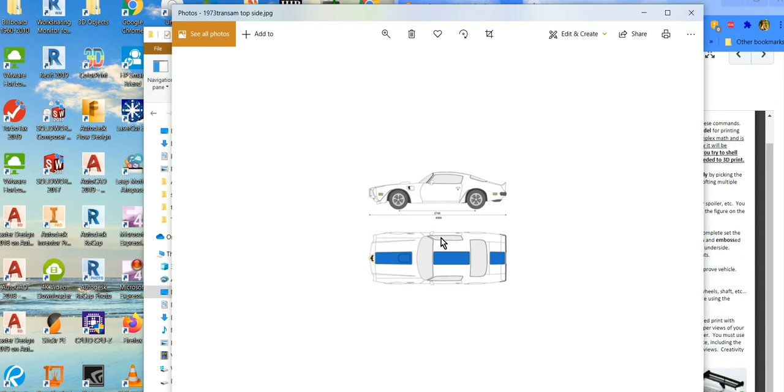So for fillet, you need to figure out where there's a curve on your vehicle. Probably the front view will show you that more than anything. So if I got my front view here, yeah, it looks like there's not a lot of curves in this thing. There's some at the top, maybe right here, and some at the bottom, and maybe on the fenders a little bit. So I'm just going to guesstimate on that a little bit. This isn't meant to be crazy accurate anyway.

So this thing is only 10 inches long, so probably an eighth of an inch or a quarter inch fillet would work out the best. So I'm going to pick fillet here, and they're not all going to work.

Okay, so you can pick your lines here and try to blend them. If they show up like that, as an example, and you get a good preview, that means they're probably going to work. If you get a bad preview, they're probably not going to work.

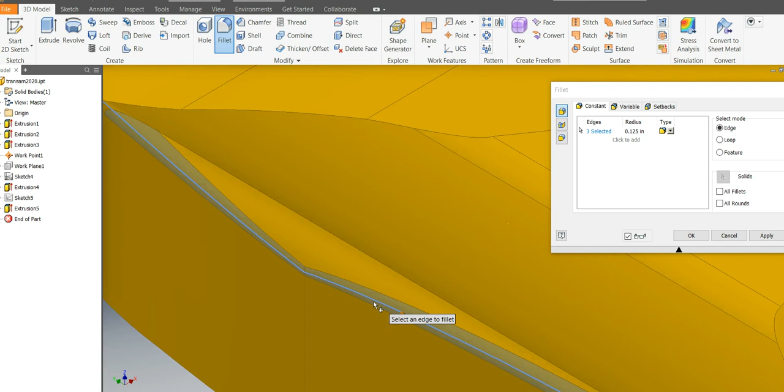You can try to keep going around the curve like that. If you have good luck, they'll go all the way like mine did there, and it's going to make it nice. I would probably try to increase that until it blows up. So maybe 0.25. And it actually went at 0.25, which really surprised me.

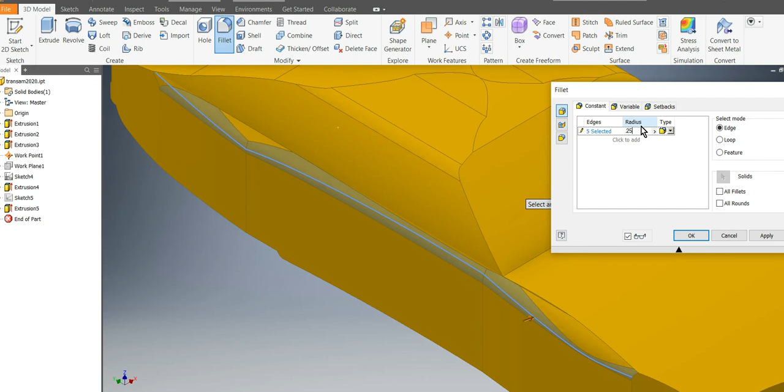Now, if I go much more than that, I can see it's running into the sidewalls here. It probably is going to fail. For instance, 0.375. And it failed. Okay, so once it fails, you just keep going back down. 0.25 is big enough, so that'll be a nice fillet on there.

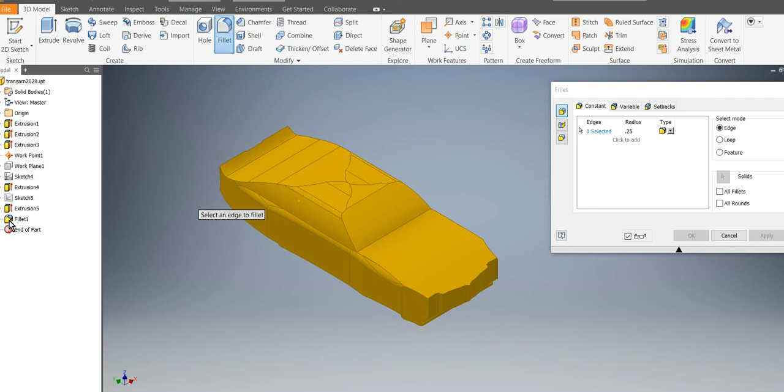So I'm going to hit OK, apply. Now the thing is, you want to do it on both sides, and if it fails on the other side, which it will sometimes, then just go back to the fillet over here and shrink it in your browser. Okay, so it's stuck at quarter now.

You're trying to remember exactly which ones I did, right? Otherwise it won't look normal. Okay, and you could theoretically mirror that, but it usually doesn't work. Okay, so that's an example of a fillet, all right?

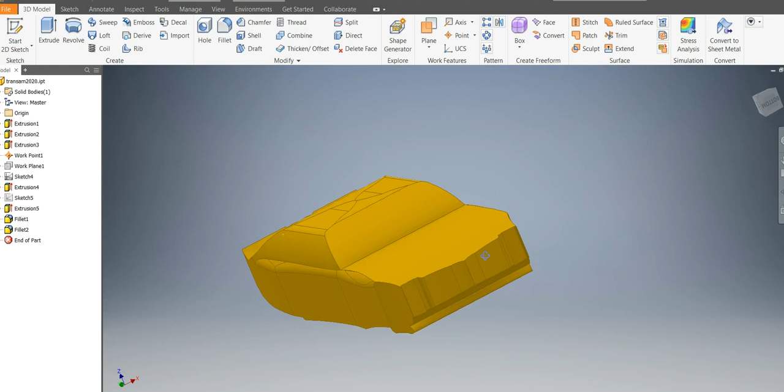And you probably should maybe do the roof. It kind of blends out the lines a little bit. Probably do the roof, probably do around the window here. That would look a lot more normal if there's a fillet around that. Same thing with the back window there. It's pretty squared off. Maybe some of these lines in the front, fillet them. Just make it match your car so it's going to look like your car.

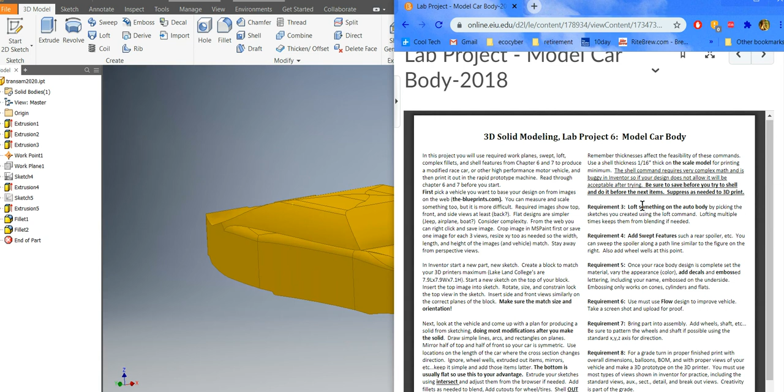The next thing on the list was shelling, because I tell you to shell before you loft and sweep, since usually these are small, skinny items, and shelling them out doesn't really work very good. Usually, when you shell something to a point, a lot of times it'll break. Okay, and it's after the fillet.

You have to do all your fillets before you shell too, because of course this corner is gone now. So if I try to shell something and then fillet it, it will not work. You won't be able to fillet it because it'll make it too empty. So you got to fillet first before you shell.

Make sure you save before you shell. Okay, you can always turn the shell off if you're not happy with it. And later on you can cut windows in it. You could add fins to the back if, like, you had an old Mustang that has those louvers on the back.

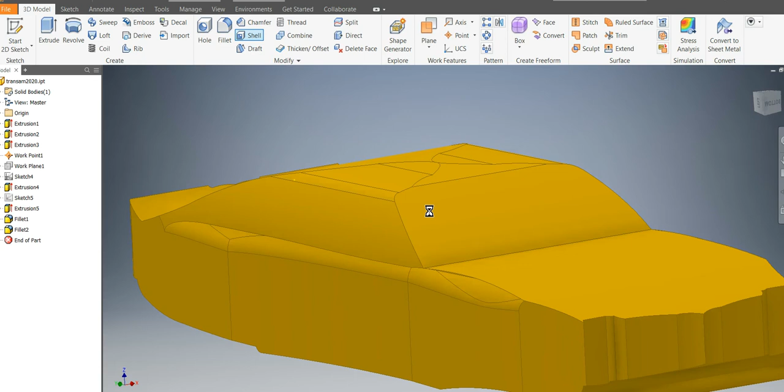Okay, so for shell, you basically pick shell, and remember this is a pretty thin vehicle, not very big. It's 10 inches by 10 inches, so an eighth of an inch would be God's plenty. I think most 3D printers will print down about 20 thousandths of an inch thick, so you can go a lot thinner than this even.

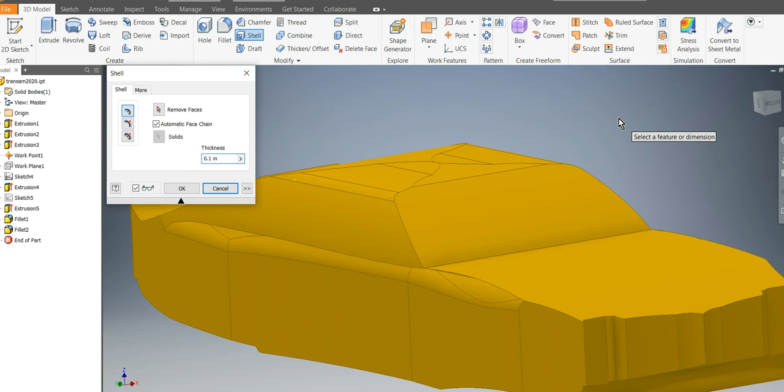I'm going to pick, it's looking for a face right here at the very bottom. You can't see it. It says select surfaces to remove. I could at this point pick like the front windshield and stuff, but it's kind of dangerous to do that. I think you're safer just shelling it out and then cutting out what you want. So I'm not going to pick any faces.

All right, I'm just going to pick OK, and it'll probably error out. Some of these points, like right there, that real sharp point, will probably make it fail. And see, this is what it does. It might come out of this, it might not. I'm going to pause the video and see if it comes out of it.

Okay, it came out of it, but it's got an error. You can expand these and see what the error actually is. Okay, it says the attempted shell operation requires large topology change. Try with a smaller thickness.

So it's like locked up. There, let me go with it. Okay, so 0.001 — so I can't 3D print it. Start out small and see what happens, see if it comes out of it. So I'm gonna hit OK there.

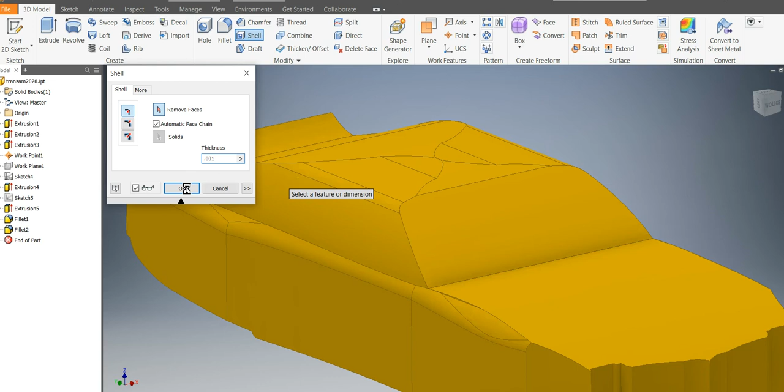And it made it at that. Okay, so later I would go in here and try to make it thicker. So it did survive at 1/1000th of an inch thick. Now that is very, very skinny, so you can't even see it unless you really look at it close.

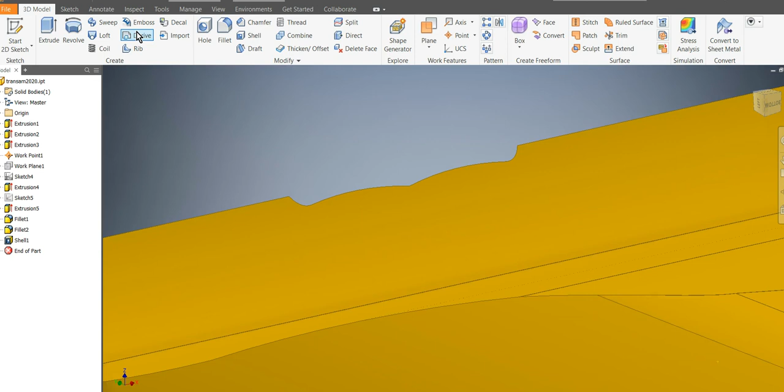So if I go this shell, one way to see it is you'd go into View, Visual Style, and Wireframe, or Wireframe with hidden edges. I think that'd probably be the best. There's a couple of them in here that actually show up pretty nice. Shaded with hidden edges might be nicer. You can't see much of that though.

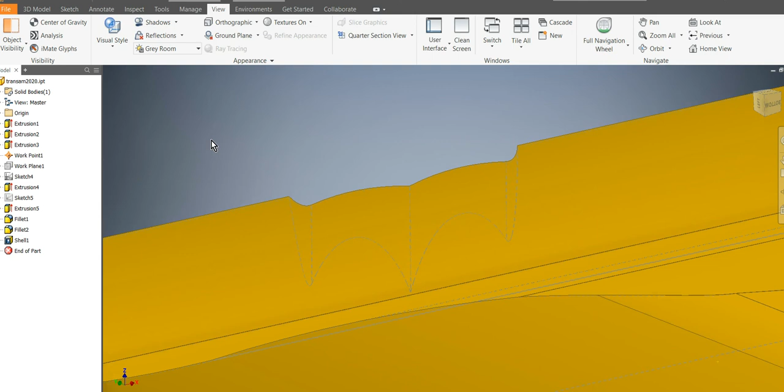Now, it's probably not even going to show up unless I really zoom in. There, you can see it. So see, there's a thousandth of an inch thick wall in this. Okay, so it did shell out correctly. So I would double click on this and go up to like 10 thousandths, or 5 thousandths, and maybe 20 thousandths until I get it to fail. But I'm not going to do that right now.

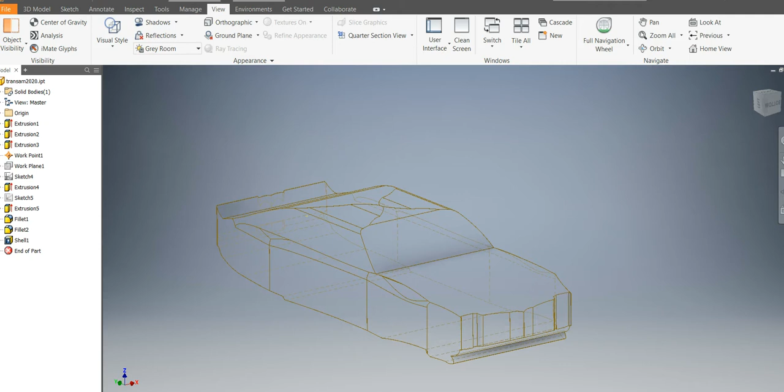So save. Okay, the next one I think was on the list was Loft. Yeah, number 3 is Loft. Loft makes one object into another object, so that's pretty tough. So I definitely wanted to do a video on that one.

So let's go back to a regular — I usually go shaded with edges as the default. And while I was in that, you can kind of do some pretty crazy stuff here. So you can go to, if you got a fast enough computer, you can go to realistic. Okay, and that gets rid of those edges.

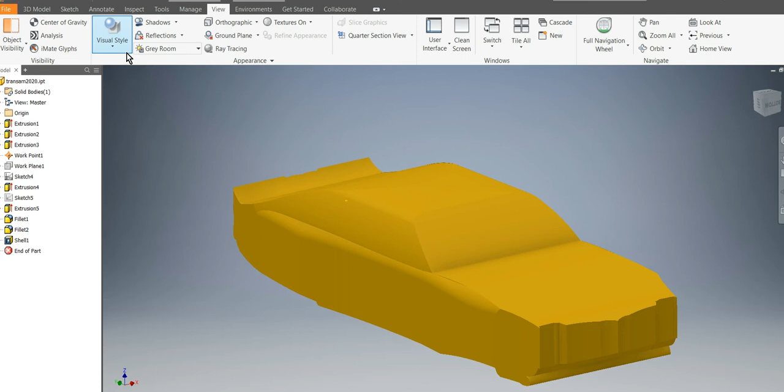And then while you're in realistic, you can do ray tracing, and that'll slow it down, but it'll basically make it look cool eventually. And once you get the decals and everything on it, it really looks realistic. So let's take that back off. But that's a nice way to kind of see what you got going on there — shaded with edges.

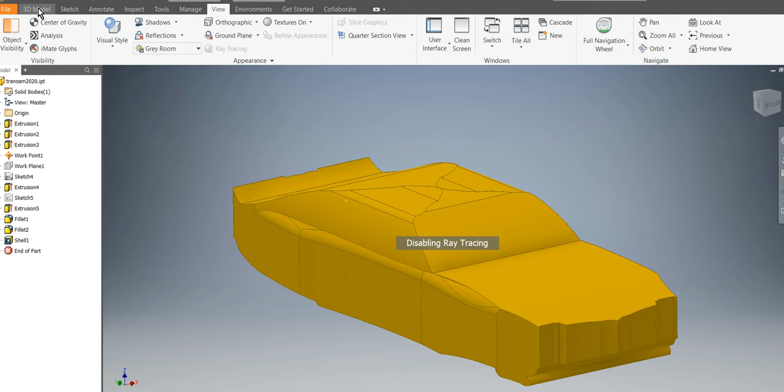Okay, go back to 3D model. So to make this a mirror, of course I'd go back and look at the front again. So it looks like my mirror is basically a skinny circle coming out of the sidewall, going to a kind of a rectangle with fillets on it. So that's what I'm going to try to do — make it kind of match that one.

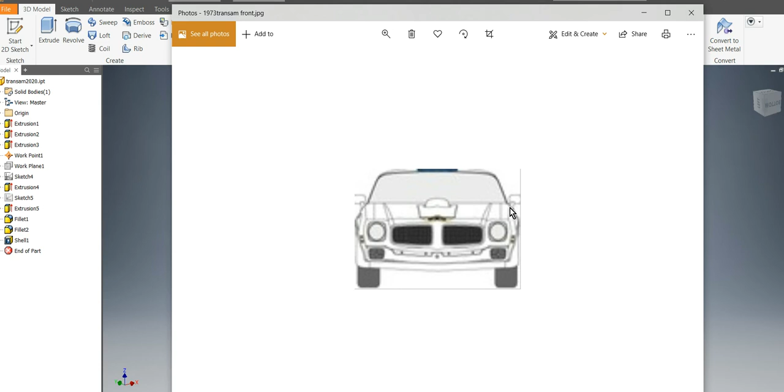It's a little tough, but you just kind of got to do a little bit of estimating. So maybe it's about 3/4 of an inch by 1/4 inch on there. You can always change the sizes. Just sometimes it's good to freehand it a little bit. So I would assume the mirror's coming out of a place about right there.

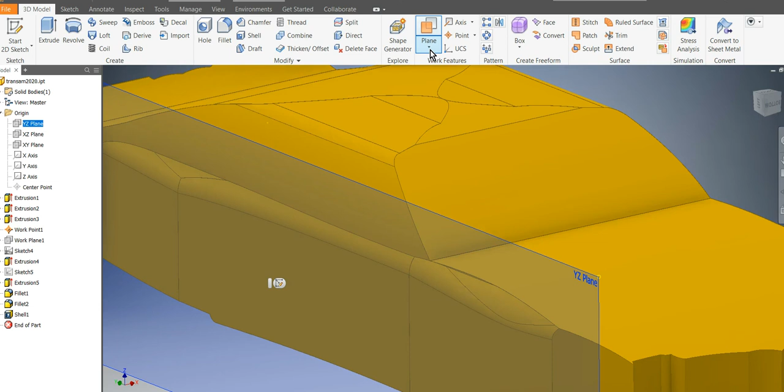So I'm going to need a plane at least inside this a little bit. All right, so I'm going to find a plane, and everybody's got to do this one — that's that face. That's the right face, but the wrong point. Okay, so I'm going to go over here, and that is the YZ plane.

Now I'm going to go to plane here, and I'm going to do parallel plane through a point. Okay, so I pick that, and I already got this plane selected. Now it's looking for a point to go through. So there's my point. Okay, so I've got a plane now right on that point, and it's probably not deep enough, so I can bring it in maybe another 1/8 of an inch.

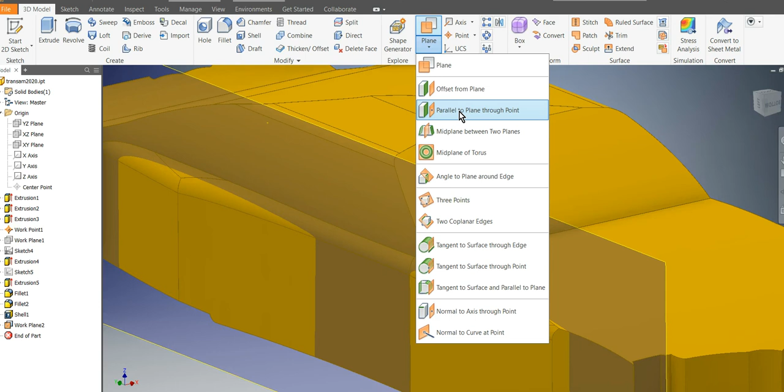So I'll do parallel to that plane, parallel plane, offset from plane. So I pick that one, and it's going in the correct direction, maybe 0.25. Okay, all right, so now I want to draw inside there. So on that plane, I'll probably hide this other one — I'll have to look at it. Turn visibility off. So I've got this plane that's bisecting my part pretty.

Did I do the right one? I turned the wrong one off. There we go, let's try this again. Visibility on. Visibility off. Why are they doing the wrong one?

All right, I think that one's deep into the car. That's what I want. You can mirror the mirror. So that's kind of, and even the wing.

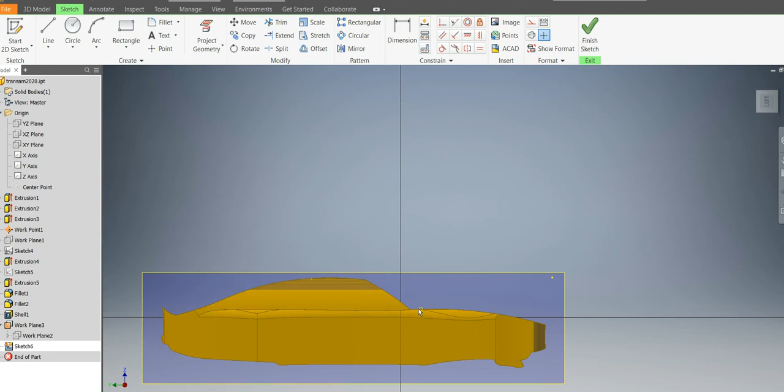So on that plane I'm going to draw my first sketch of my loft. This is a little tricky, but you want to think about where the mirror would be. It's probably going to be right about here. So I'm going to draw a circle on there. Well, I don't like circles, an ellipse, it'll look cooler. So right about on this point, somewhere in there, I'm going to draw it to be aerodynamic, coming out like that.

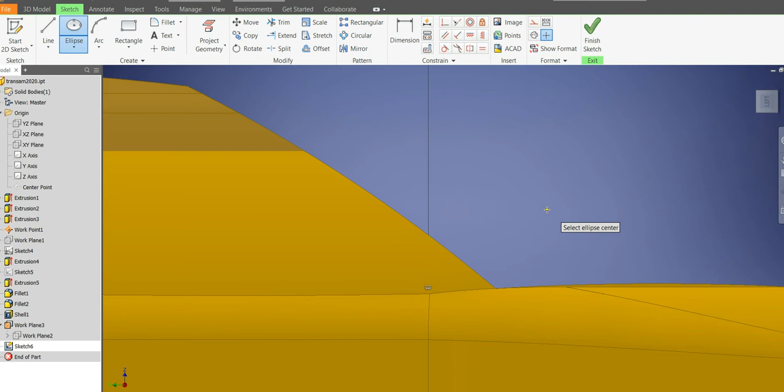Now you can't see it. If you hit function 7, I can see - it'll actually break away the stuff in front of it. Then you can see it. So that sketch is finished, close enough.

Might be a little bit too small, but oh well. Now I want to do one that's parallel to the front of the car, back at just past that point. So remember where you're at - I'm right here, so I need to go a little farther past that. I'm going to make a plane parallel to that one through a point, picking this same point as I had before.

Now I'll make another plane offset from that one and go that way, maybe 0.25. Let's see how much that is. Close, that might not be enough. Let's go 375 - you can always go change it later, you just double click on that plane to change it. Even after you made your design, you can change it by double clicking on that plane.

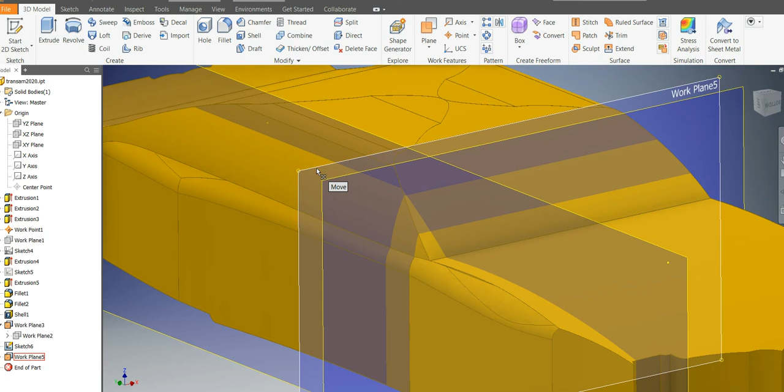All right, so I need to put the actual mirror face that you would see on that plane. So new sketch - I'll probably hide that plane again. Let's see if I can do it in less than 10 tries this time. So that's the one I want to keep, so this is the one I want gone, I think.

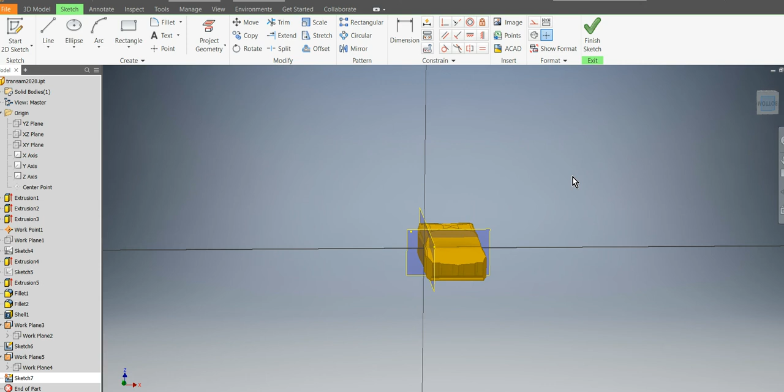So I'm going to hit F7 to see where my car is at again - function F7, can't see my keyboard. You can see it is hollow on the inside. That's kind of cool. So now I'm going to go make another ellipse.

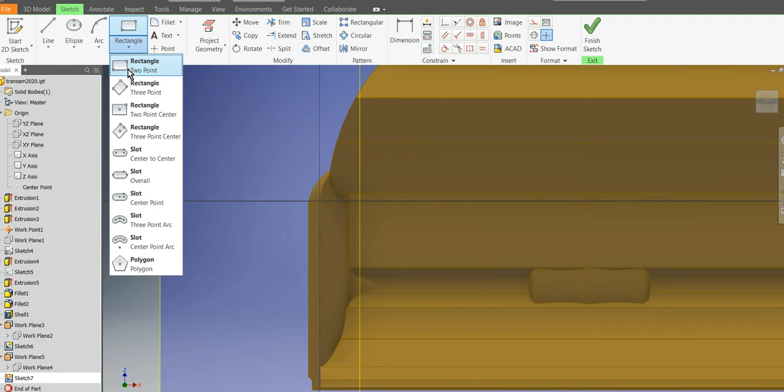I'm going to make a rectangle, right kind of rectangle. I don't know, there's none in here I like. So I'm going to make a 2-point rectangle, put some fillets on it, I guess. So right here's my origin, I think - where's my origin?

You've got to be - it's got to be on the outside of the car to see your mirror. So, 2-point rectangle. That's fine, I can always change the sketch later if I don't like it. I'll put some fillets on it. See how quarter's too big, so maybe 0.06.

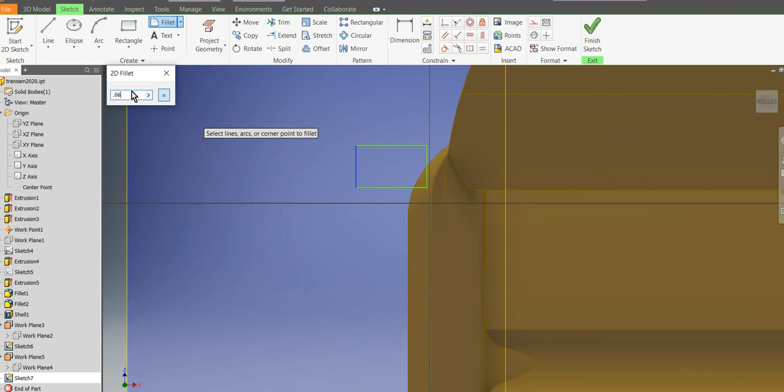That looks good. Just kind of round it out so it doesn't look so stupid, right? And then finish that, finish sketch.

Now you can try a loft from there to there. It's nice to have a guide path - a guide path has to go from this sketch to this sketch, and it makes it look more realistic instead of going just straight over there. So I'm going to do that. I'm not making you have a guide path because that's pretty hard, but it still does - if you want a cooler looking mirror, it does help you get a cooler looking mirror.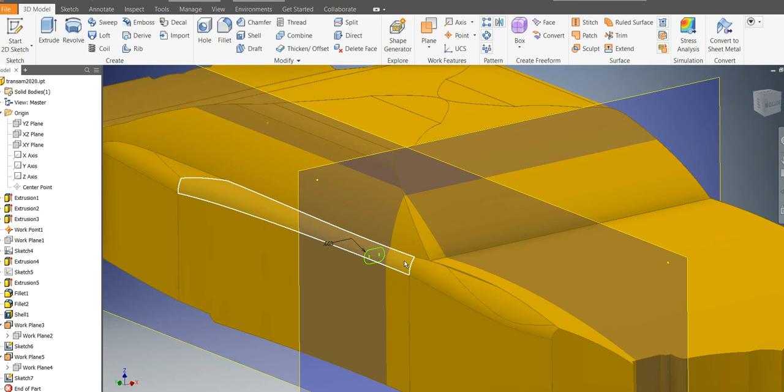So on the other plane, the only one we didn't use, I need to do the same thing again - offset through point, maybe right into there, so then I know it's crossing because it's got to be inside there. Okay, now I can draw right on that one. I don't need to make a whole nother one there. So new sketch on that plane.

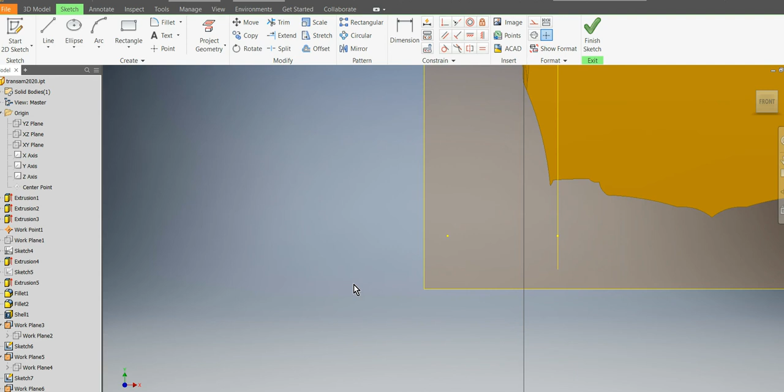Hit F7, and I probably won't be able to see my other sketch here. I can see it good. All right, so I need to draw something from here, that sketch to this sketch. I'm going to draw an arc, and hopefully that little circle will go into that big circle.

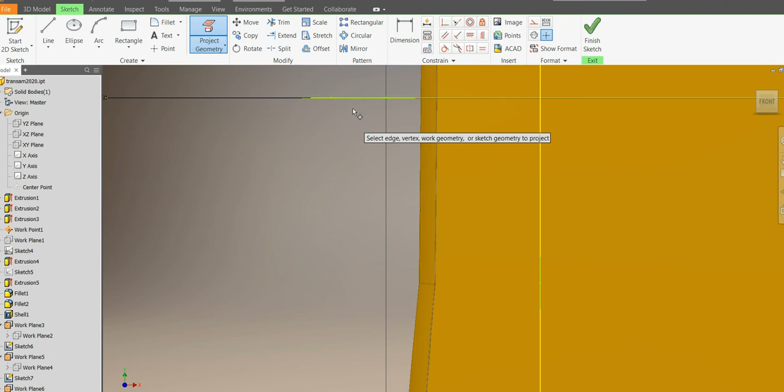I'm going to project geometry, project the center point. Try to - I think I got it. Arc. No, I didn't, gosh darn it. Try again, project geometry. So if I hover over this long enough, it ought to give me options. It did - so I hovered over that, and I got point, curve.

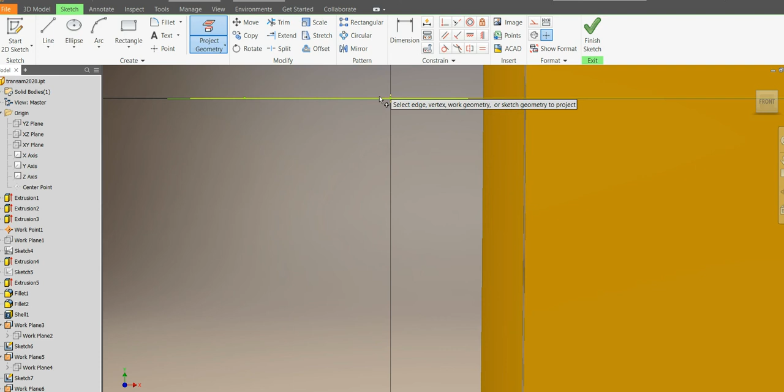Which one is it? There's a lot of options here. Try point, I got that one. Good. Alright, I'm going to do the same thing over here.

Project geometry, hover over this until I get what I want here. Okay, takes a while, drop it down. Face, work plane, I don't want any of those. Maybe I can put a point on that. Yeah, I was able to put a point on it.

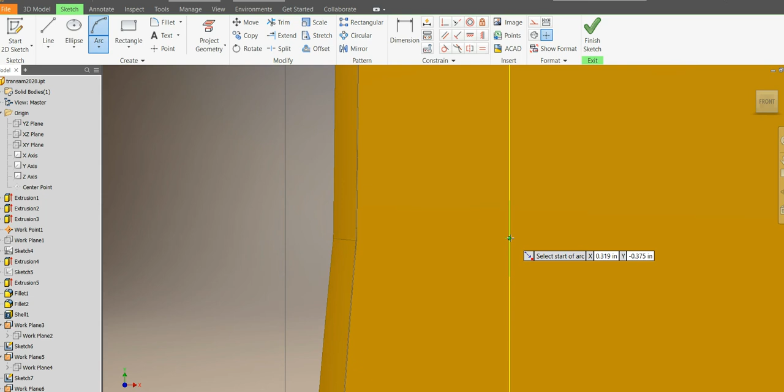Good, so now I'll draw an arc from that point to this point. Although Inventor's points are first, last, and then radius. So, yeah, looks pretty good. I don't know, finish sketch.

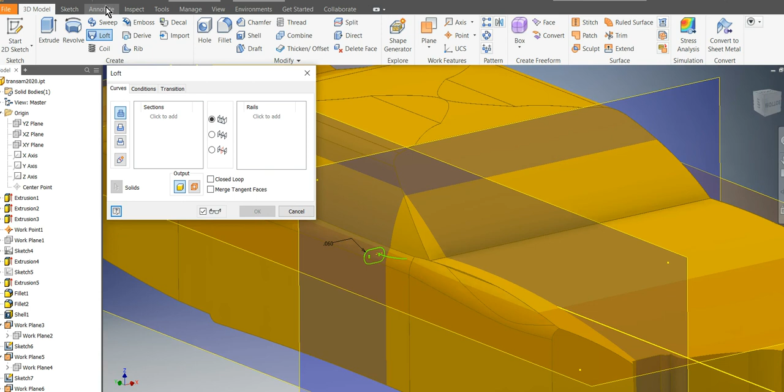Alright, so now we're going to do a loft. All that just to do a loft. Okay, so loft is there. So you pick your first sketch, and I'll probably have to go to View, Visual Style, Hidden again, Wireframe.

And I can see my sketch in there. So I pick it, second sketch, pick it. Okay, you can see what it does. It goes straight over there. It looks stupid. So then you pick guide rail, and I usually pick the middle one.

And then I select my guide rail. Okay, but now look at it. It's blended pretty nice. Now you can adjust that guide rail.

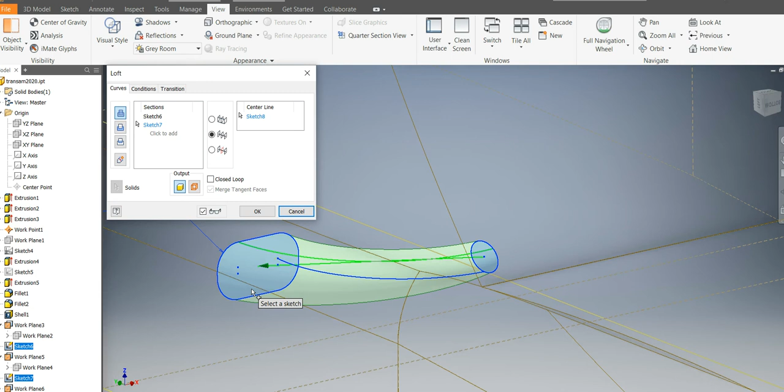Go back in that sketch and adjust that. Go back and sketch, adjust that. Go back and sketch, adjust this to make it look even better. Okay, but that's basically how you do it.

And then you can see, then you're looking. It's a pretty decent looking mirror, actually, not bad. And then you mirror that to the other side to get the other one. You mirror it across a mid-plane.

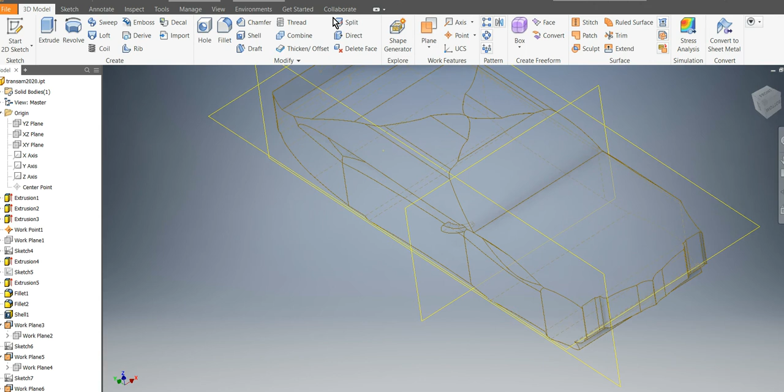So we made a mid-plane last class. If you don't have one, you just pick 3 points in the middle. So to go over that one more time real quick, I go to plane, 3 points, which is the most standard way to make a plane, 3 points, and pick 3 points that are in the middle.

There's one there, and I want a nice one. I'll pick one in the middle on the other side. There's one. So now I've got a nice mid-plane.

I can mirror that across real quick, easily. Just mirror, pick my feature, which is this thing, go to pick my plane, which is this thing, and hit OK. And sometimes it'll fail, but it didn't fail there. Now I got 2 mirrors, okay?

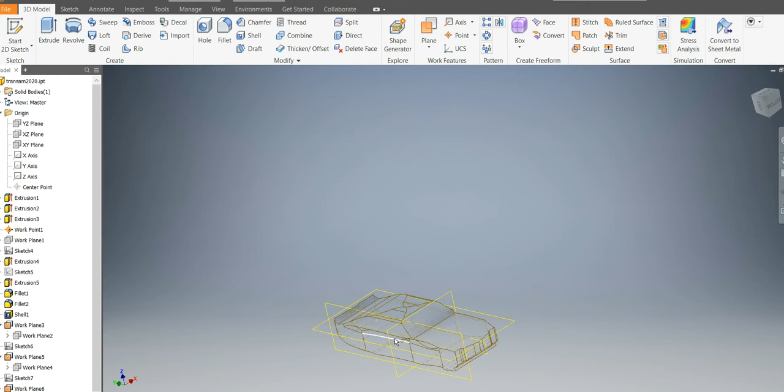Now I'd make that bigger. That looks too small, but anyway.

Okay, so the next one was a sweep. Sweep is the same thing. It's easier, actually. It's exactly the same thing, except it's a sketch following a guide path, or a profile following a guide path. So you only need one sketch.

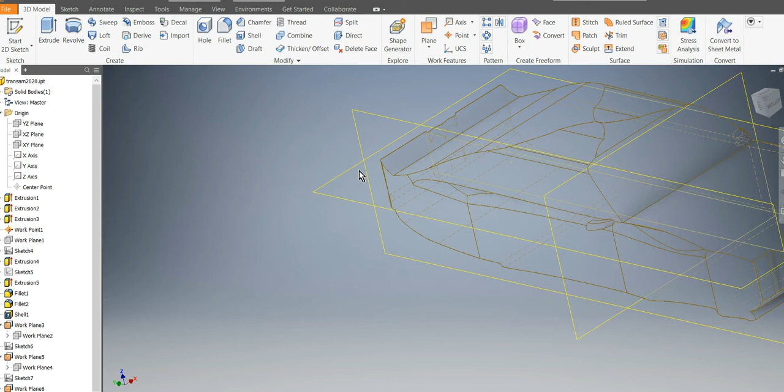So like a wing, for instance, I would do on the top of this plane here. I'm just going to do it real fast. I've got a back spoiler, so I don't know if I'd really want a wing on this or not, but just to show you how it works, I'd probably just do it all with arcs.

Maybe come to a good spot like, I don't know, something like that. Give it a little bend, not much. Do another one up here, and this one's going to be tight. This is about a half circle.

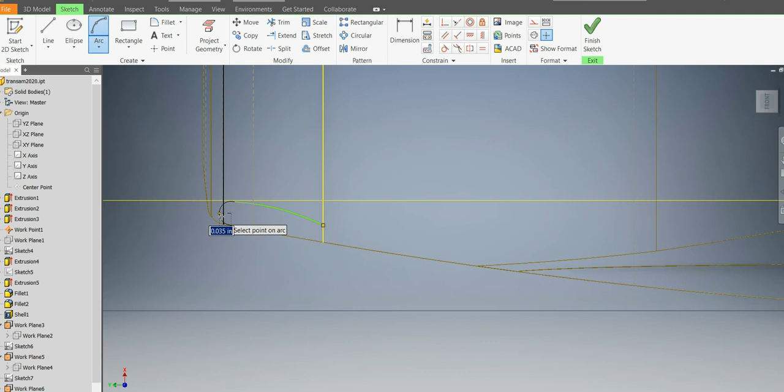Try to make them tangent so I don't get any lines there. I had it, there, I got a tangent there. And bring it to this one. See if I can get a tangent over there too.

It's not letting me, but I could probably force it. So if you want to get rid of it, there'll be a line here unless I force a tangent by picking that line and this line. And that did a tangent. So this should be a nice wing profile.

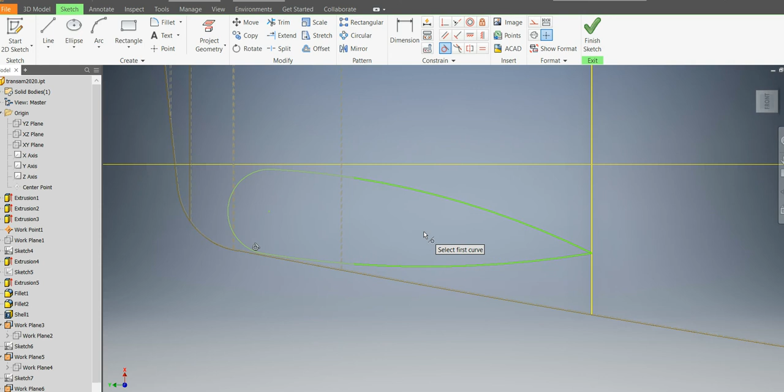And then you need to put a plane right here in the middle of this thing, okay, and draw what profile you want to take. So if I finish that sketch and put like this plane straight back there, so I go plane, offset plane through point, pick this plane here, put it through, I don't know, right about in the middle here.

I got to find something in the middle. I don't have a point there, so you got to create a point. Create a point in the same place as you create a plane. I'm gonna put one right in the middle of this thing if it lets me.

I'm still on something else. Point. I was hoping it'd let me put one in the middle of this, but it ain't.

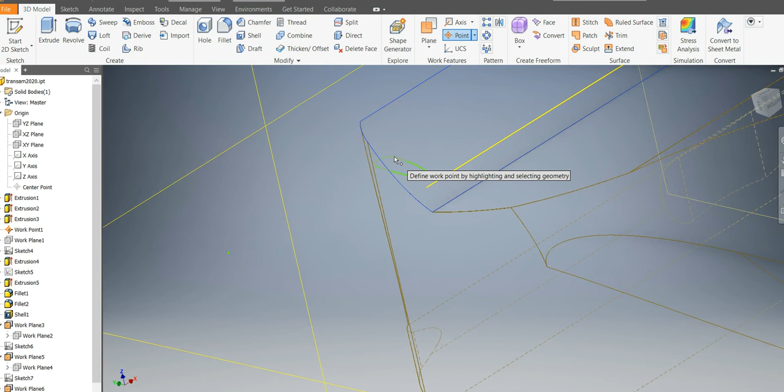That stinks. Do I get one? Well, usually it'll let you do that.

Let's try right at the beginning of this thing. It's letting me put one. Is that bisecting it? Barely. I should be able to offset to that and maybe go back another half inch or another eighth of an inch if I have to. So I'll plane through point.

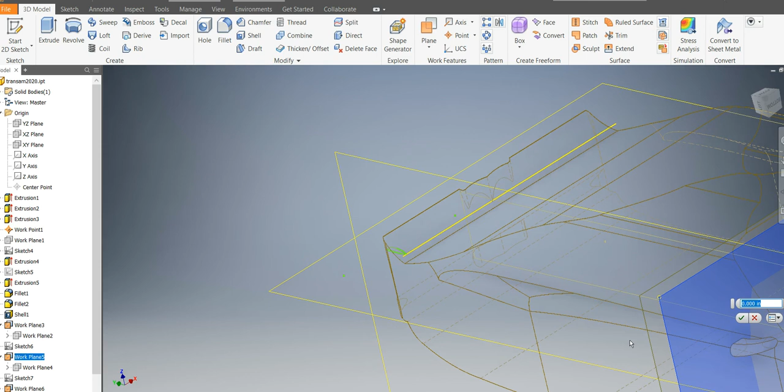Or you can just offset from and make sure it goes through the middle of that. Let's try that. I'll do that, going in the right direction, maybe 4 inches. Then go to the side view until you get it right through the middle of your item there.

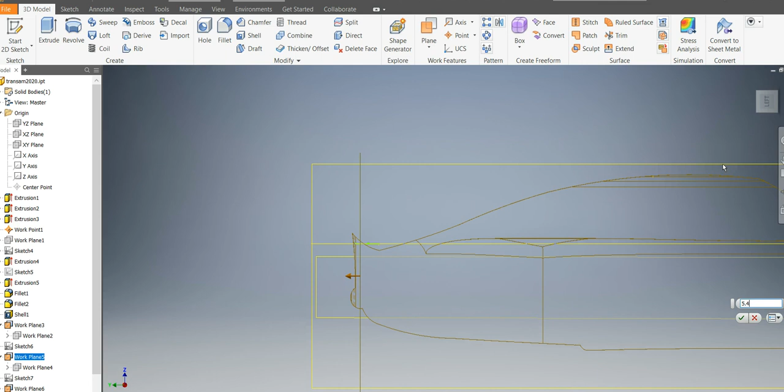There's my plane and there's my sketch, so it's not enough. I go sideways 5, 0.8, too far, 0.4. There, I've gotten inside of it a little bit. 0.3, looks like that's in the middle. You can go to a corner view like this and see it a little bit better. Make sure it's in there, yeah, so that's good.

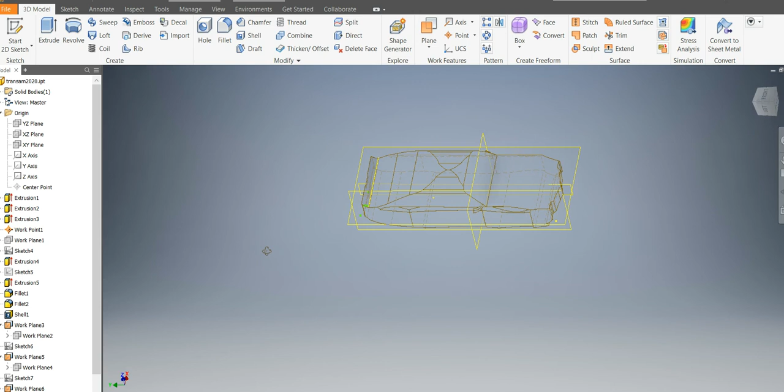So that's the plane where I want to draw my sketch on. Did I not do it? I think I just exited out. Okay, try again - plane, offset from plane. I think I did 5.3. Yep, got to finish it. Check mark. Okay, so I've got that plane.

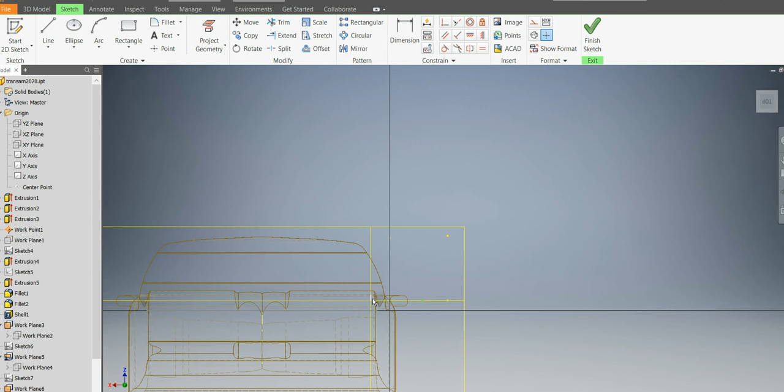Now I'll draw my path on that, so a new sketch on that. Remember, the path needs to go through your wing, which looks like it's right there. You can go to a corner view to see it better. So I'll probably start right there with my path.

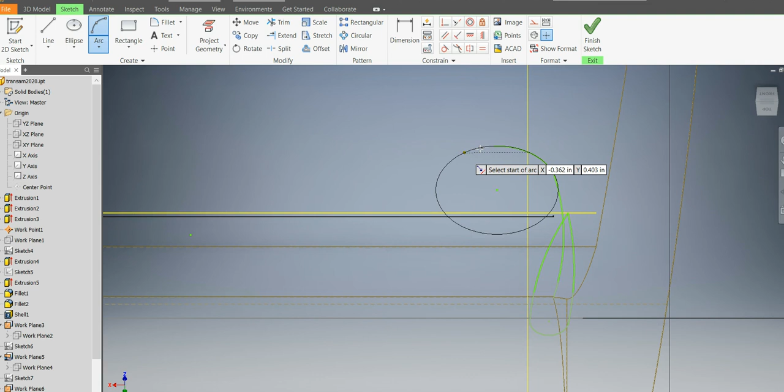So once again, I'm going to use arcs. I don't know how big a wing you want - there's 3/8, that probably wasn't enough. Try to make all the lines tangent, so go back and make those tangent. I'm not going to do that because of the nature of time here. And then go to the middle.

Okay, and I'll probably just mirror it. Again, I'd go back and make all these tangent - it's real easy to do. Might mess it up because I did it so quick, but it didn't do too bad.

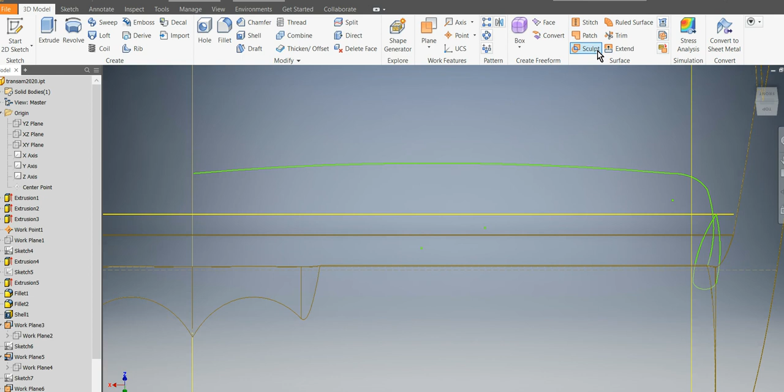Finish sketch. So now you try to get this thing to follow that with sweep. So sweep, they already picked the profile, now it wants the path, so I'm going to pick this.

It's probably a stupid looking wing, but it says path does not intersect profile, recommended for best results. Path to continue - yeah, just do it anyway. It did it anyway, didn't like it, but it did it. Usually it won't even do it. So my path did not go through my profile, so it kind of messed it up. I thought I did, but you've got to make sure that path goes through the profile.

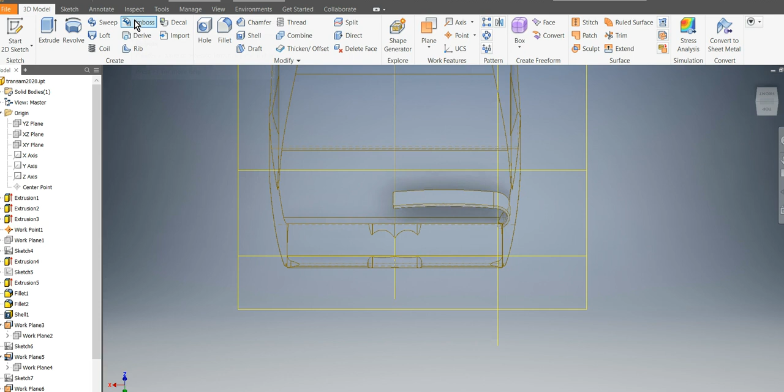Okay, so now we go back to the visual style and see what we got here, see how bad it looks. That's a pretty wild wing. You can get the idea. I should have gone probably straight up, put it straight over, and then put a fillet on the line in between - it would look better. Then mirror that to the other side to get it.

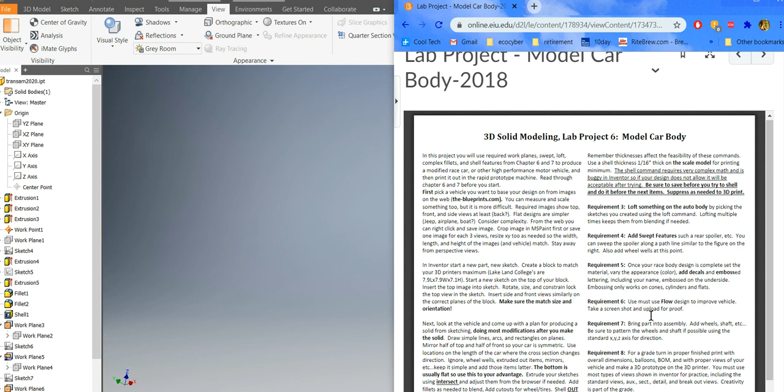So that is the first 5 items in there at least, and pretty much all the hard ones. You should have done decals and embossing before. I'll show you, I'll do them just real quick while we're in the video here, and then we'll be done with the videos. The last part of it is doing assembly. We're going to do the wheels in another video, and I'll see if I can do the flow, but we might not have to do that.

Okay, so the decals and embossing. Embossing is basically just putting your name on it or something like that. So on this plane, if that's a plane, I'm going to do a new sketch. It wasn't a plane, of course, so I need a plane underneath there. I'll go back later and turn all these planes off because they get very annoying.

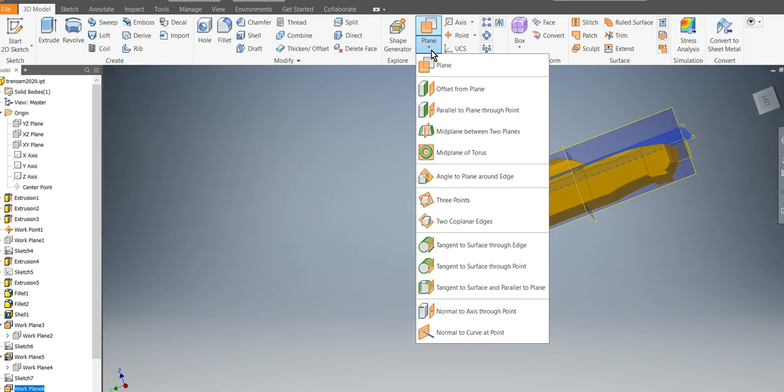So I need a plane below it. I'm going to take that plane, back to 3D model, offset that plane lower. So -1, so I know it's below the car. That's not below the car. -3, there, that's below the car.

Do a sketch on there, a new sketch. Now we did this with the skateboard, so it shouldn't look - it's upside down there. So now I basically want to put text on there with your name on it.

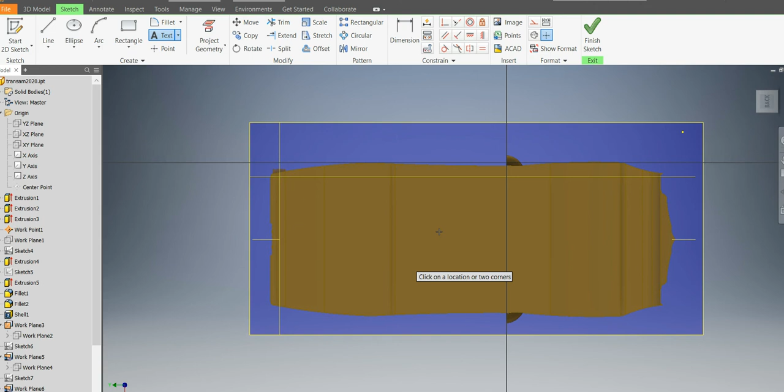So, text - an eighth's not big enough, so maybe 2.

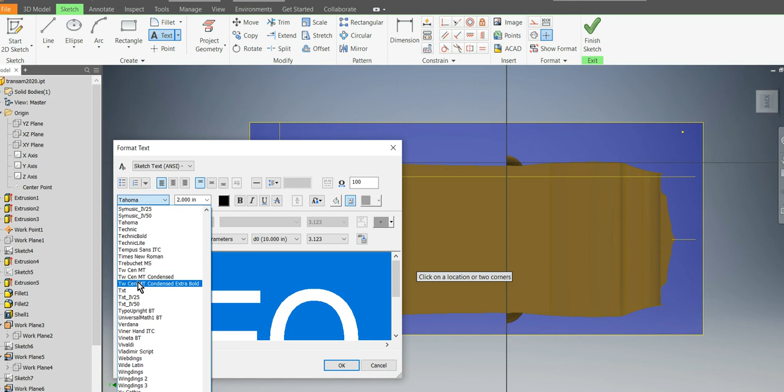And remember, if you want to change the font, you have to highlight it, right? So if I want to change the font to something that doesn't look stupid like that, I've got to highlight it. So, Times - it won't be able to do real fancy fonts, but Times New Roman, it should be able to do it. So, and it's backwards and upside down.

I have to think about how to fix that. I had it figured out the other day, but now I can't remember. You need to rotate it for sure.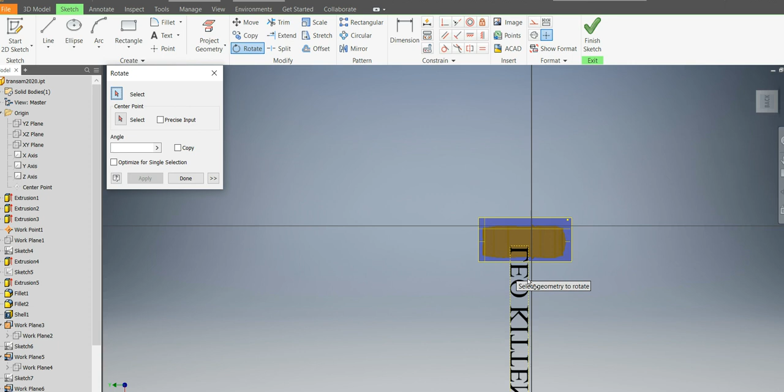Center point, let's just do 90, and it's too big, of course. So double click on it, highlight it all, make it a lot smaller. So 0.5 would be about right, maybe.

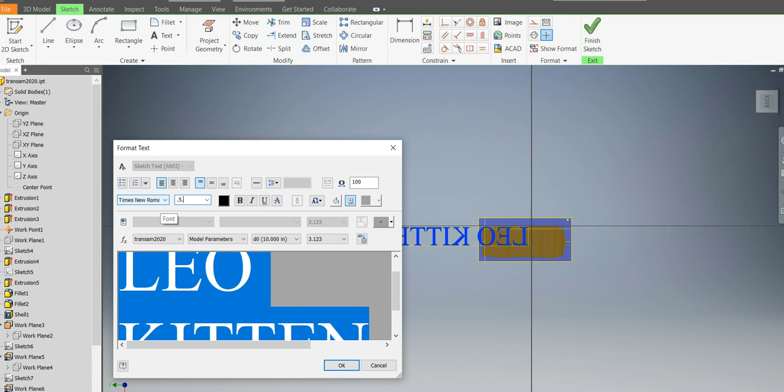Yeah, that's a lot better. Put it in the middle.

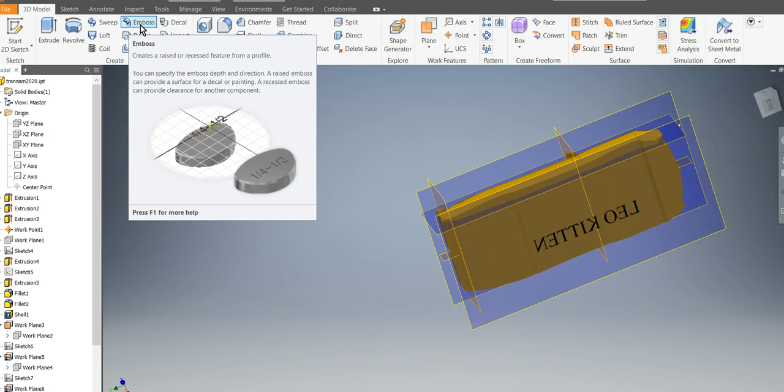Finish sketch. Okay, so if you want to cut that through the bottom of your car, you can actually extrude cut it in there, which is the same thing as emboss, but emboss will go around curves, simple curves, not complex curves. So I'm going to emboss it because you have to do an emboss.

So 0.1 is the depth. I'm going to make it add plastic to it instead of taking it out because it's so thin.

I don't think you want to hit wrap to face. I think you just hit OK here. Didn't like that. Switch directions. Okay. Didn't like that. Hit wrap to face.

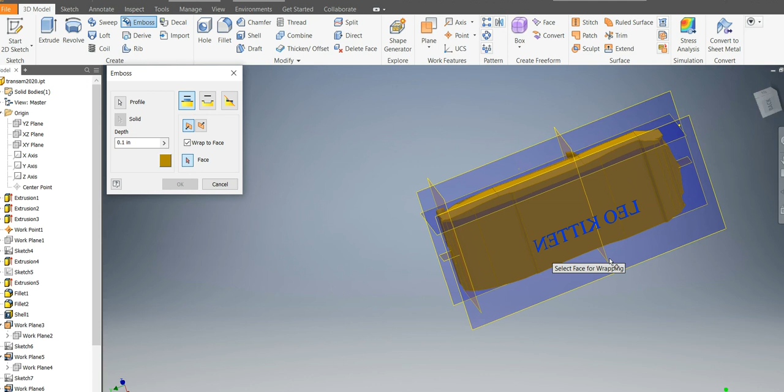Pick this face. There, it worked. Now if the face is not flat, a standard circle type curve, it's not a fancy curve, it won't actually go on.

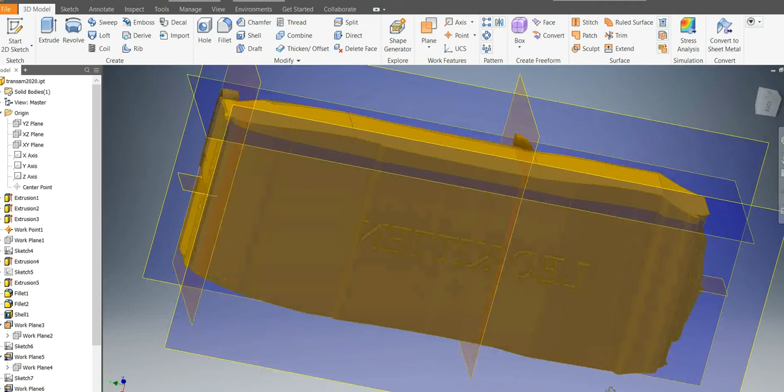So it'll give you an error if you go too fancy, because you can see my lettering on there. Now it's upside down, so I'll have to figure out what I want to do there. There's a way around, I can't remember off the top of my head. I'll put that in the notes once I remember.

Decals are real easy, but don't do that till last, okay? It's one of the last things you do, but I'm going to do it right now. I'll turn it off after I get done just to show you how it works.

So first you got to bring your images back. So the images we remember were on our very beginning and in our second sketches. So like the top one, you can only do a couple of them, but there's the image.

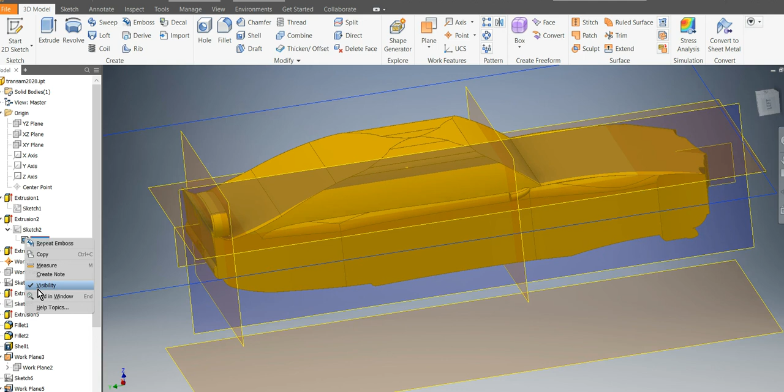I'm going to right click on that. It says it's visible already. Probably got to make the sketch visible. There we go. Now I can see it.

So I'm going to decal this onto there. Okay. So to do that, you go to decal. Okay. And it wants you to pick the image, so that one. And that wants you to pick a face, which that might be a little tougher, but I'm going to try.

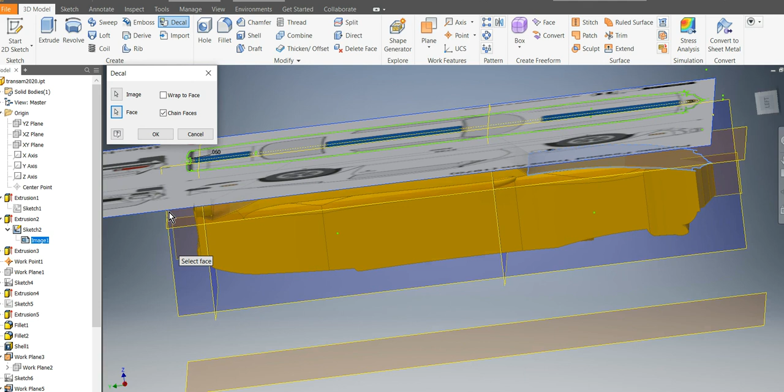Right there. Okay. Chain face is the wrapped face. I don't remember if you pick both of them. We'll find out. I don't think you have to pick them.

Nope, you don't have to. And if you do the front and side, it'll actually turn your car into the color of your image, which is kind of cool. Okay. So now if I turn that off, you'll kind of get the idea. So I'll hide the visibility of that.

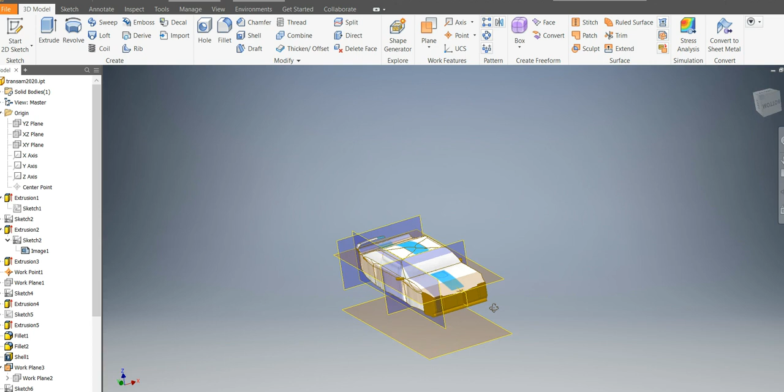And you can see it's kind of making the car look like the original. Now it's not going to look exactly like it, but it'll look pretty close. So you'll want to do that to the front and the side, and it'll look a lot closer, okay?

Of course, you want to cut holes in there for your windows after you fillet it and after you shell it. And whatever other items I have in the notes there, I'll read through it, and I'll turn the video back on if I notice any more.

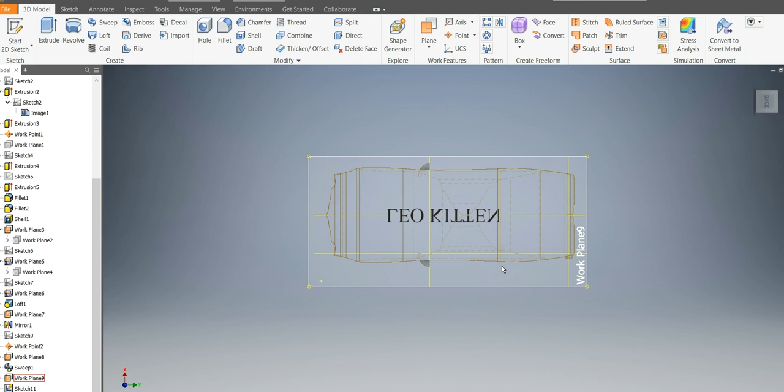Okay, to get that text to work, I had to flip normal on the plane itself. So basically that text is on this plane. So I'm going to pick that plane, right click on it, and go flip normal, okay?

And now it brings it right side up. Now I have to move the text yet, but then it all should work out a little nicer. So center it on there, and then I had to emboss it.

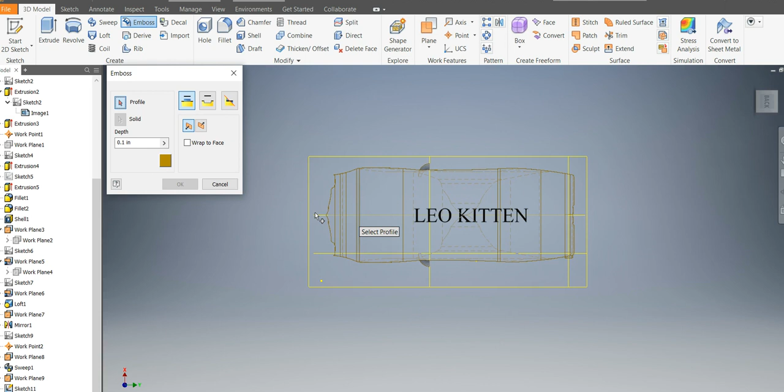I had to get rid of my emboss, of course, because it didn't work until I did that. So now if I emboss it, profile is that, and then wrap to face, pick that face, hit OK,

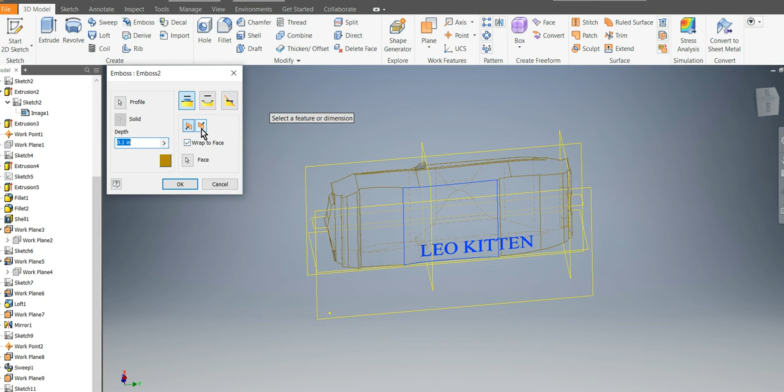and it didn't work. Okay, so let's go back to the emboss. It's probably going the wrong direction. So go that direction and then try it. There we go. Now we've got it on there.

Now go back to where I can see it. So view, visual style, shade with edges, and there, it's actually right, okay?

So do all your embossing. Now your embossing, if one is over the top of the other, sometimes the embossing won't work. So the side view might not work since I already did the front or the top over it, okay?

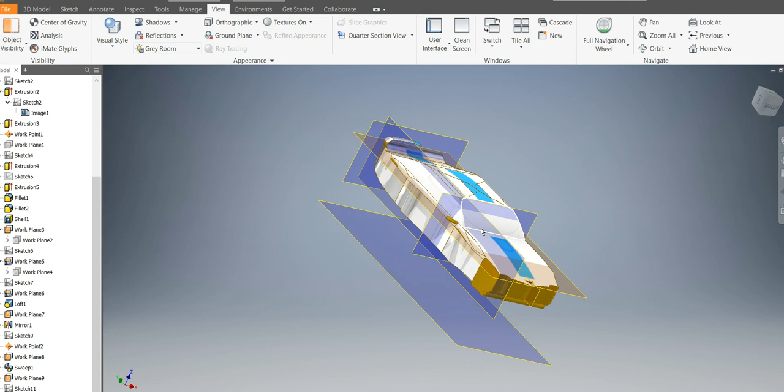So pick the one you want to do. And of course finish the wings and stuff before you emboss it so it looks better. I think that's enough for this video.